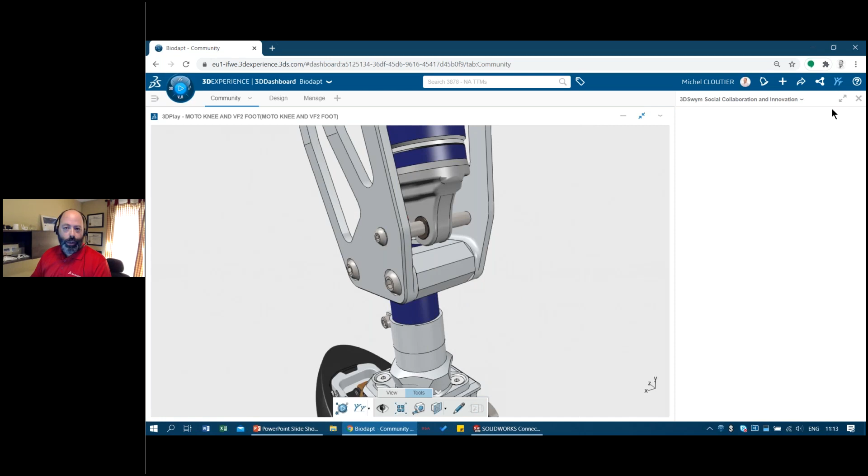Now with that, we also have access to create what we call communities. Communities are just a great way to exchange on different topics that we want to talk about. So here we have some colleagues of mine. I can see that Todd is online right now, so I could give him a call through the 3DEXPERIENCE platform, chat with him, or do a video call. But earlier we got Tandy that put a post saying, hey, we need to check a couple things. So he created this screenshot and put it into the message board so everyone in the team can collaborate. And there's two things.

We see down the bottom, there's too much deflection with the pin, so we need to fix that by modeling a new part. But then we have to validate the motion in the assembly as well. So that's going to be the first part of our task today. And the second part is going to be to design a cover for the foot and also insert a link that we see here. Again, another image that I put on the message board saying, hey, this is what we want to do next, right? So this is going to be our task for today.

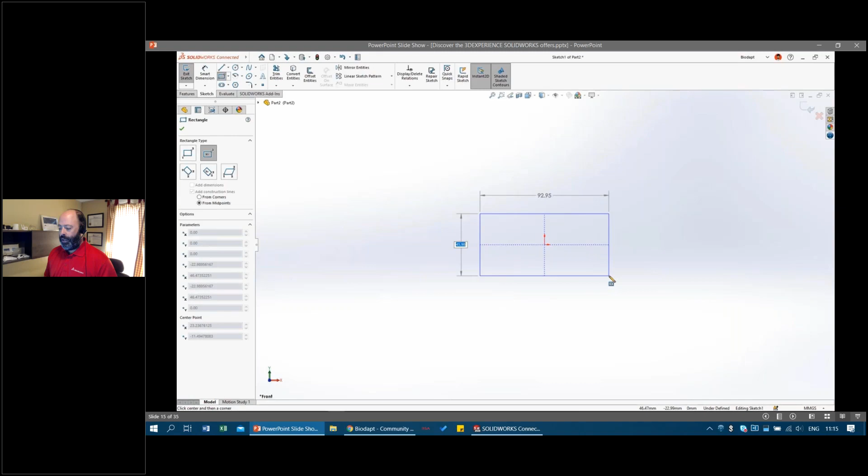Now, with regards to what we're going to be modeling, we're actually going to be modeling this little part. To save some time, because I'm sure most of you are very familiar with SolidWorks by now, I'm going to fast forward the modeling a little bit. So let me just walk you through how I've modeled this part inside of 3DEXPERIENCE SolidWorks. I start with the front plane and then create a rectangular sketch, put in the dimensions, 25 by 65, and extrude that mid-plane with a width of 40 millimeters.

Add some fillets, gather all the fillets with FilletXpert, use my Hole Wizard to put in the exact drill and hole I need. Then I go ahead and model the tab on top, extrude that using the M key for a midplane. That's a shortcut. And then I end up with this part. So very straightforward, fairly simple to do. It takes a couple minutes.

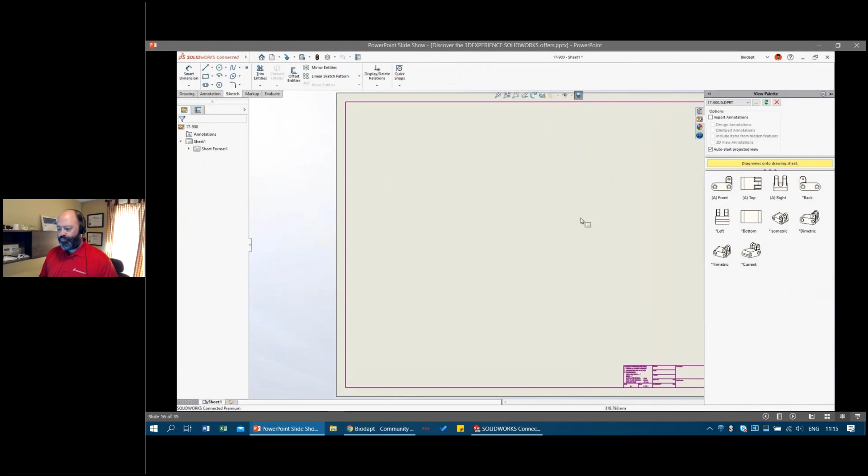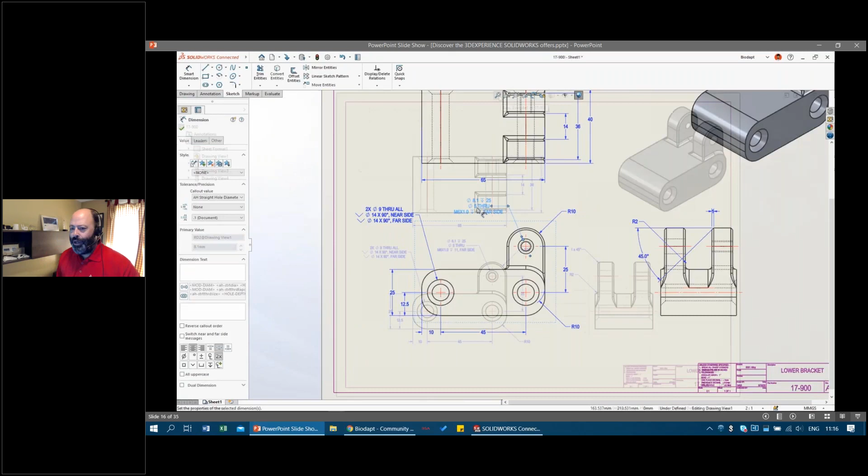But then I want to also do a drawing. Again, 3DEXPERIENCE SolidWorks is not very different than SolidWorks in how it works. Sketch, parts, drawings, views. I go ahead and insert my model items. They appear on the screen. I do a little bit of cleanup. Again, this is something for a SolidWorks user, not something new, something you probably do day in and day out, and that's where we're at.

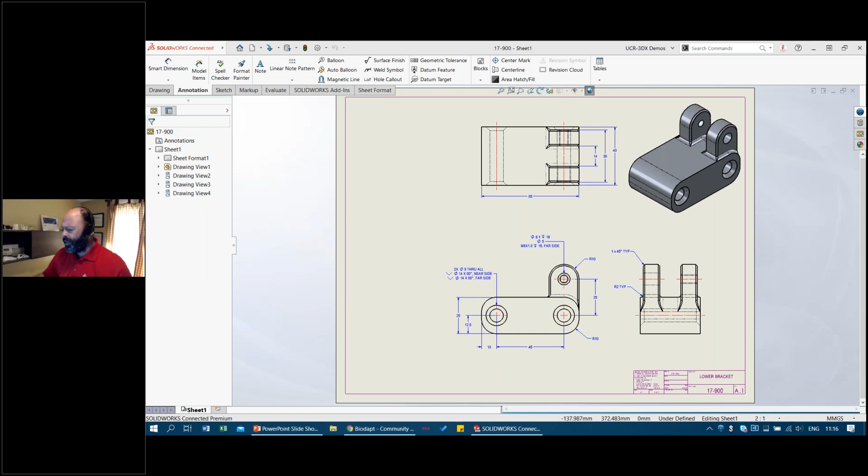So I just wanted to fast forward a little bit to save some time, but from here, I'm actually going to jump inside of SolidWorks and pick up where we left. So that's where we are right now. And one thing I want to do is that I now need to put in the hole here where the foot will connect, right? So for that, I'm gonna turn off my webcam just to save some bandwidth. Let's go ahead inside of SolidWorks. I'm going to use my regular SolidWorks command I know and love. That's my part, right? So I need to get that foot connecting feature.

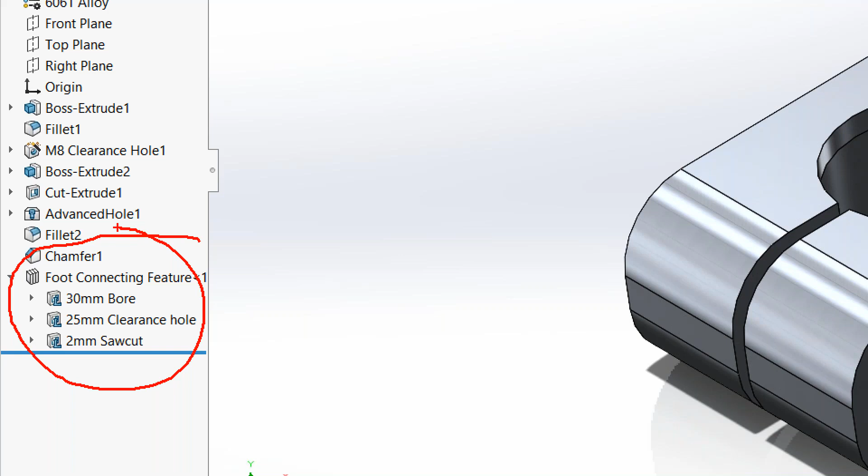Now to save, again, a bit of time and maybe a little trick here, I really encourage you to use library features to do that. You can actually save a couple standard features built into one. You can even configure them. It's a drag and drop. I select the edge, which is going to define the midpoint, and say okay to that. And very quickly, this allows me to model basically three different features just by a drag and drop from my design library. So again, that's a nice way to save some time.

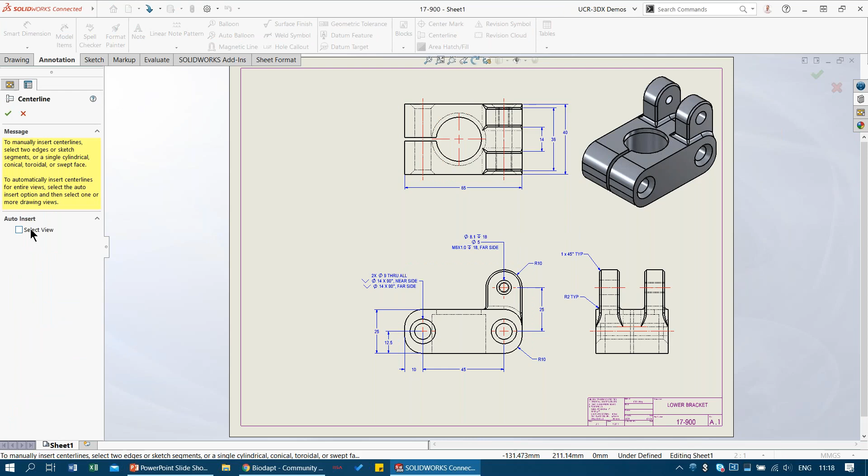Going back to my drawing using Control Tab, of course, the drawing is going to update, but I need to add a bit of information to that. For example, I want to add a center mark on the top view. I might also want to add a center line to the front view, like this. Click OK. A section view would really help me here. So using, again, my shortcut commands, I'm going to draw in a section view. Little tip here, when you've got a center line, you can snap to the center line. Really helps you make sure that you drop this section view dead on the center line. Click OK. We already got the center lines showing and the hatching because I've defined the material earlier.

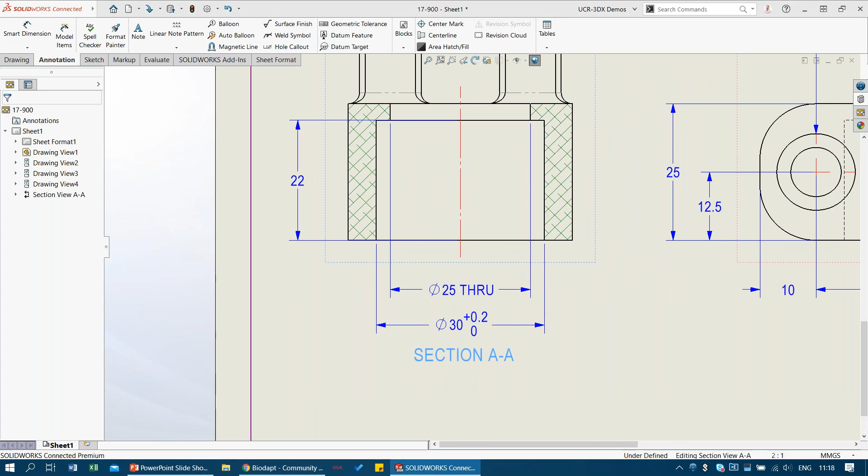Now, the last thing I'm going to do here is bring in my model items for the select few features that I've just added for the entire model, and click OK. And maybe do just a little bit of cleanup. So let's just move this over here. Let's go on top, and maybe we're going to add one dimension from the edge to the center, and that's going to be it, right? So I've finished doing the drawing. Now I need to save and update this.

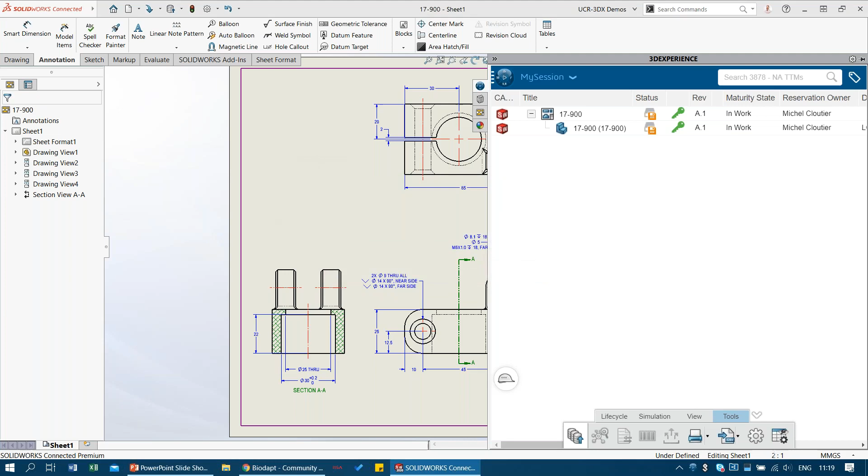Now, like I said, working with SolidWorks is not very different, but saving files is a little bit different. When I expand this window, I see my drawing and part associated with it, and there's a little status that says the file has been modified since my last save. Now, if I want to save everything, it's basically just one click. I hit the save button. It prompts me with this panel that presents me with some options. If I'm happy with them, I just hit save, and okay. I could also use Control S on the keyboard. It would have accomplished the same thing.

Now, the difference is that this is being saved directly on the cloud. What that means is that for other colleagues, if they want to look at this part and work with this design, they have access to it. It's instant. As soon as it's saved on the cloud, everyone has access to it.

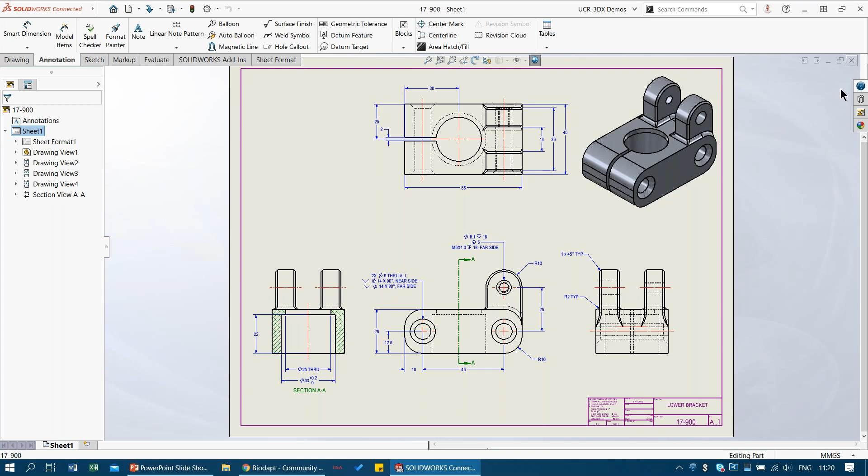Like I was saying earlier, modeling with SolidWorks is not very different than what you're already used to. The tools are the same intuitive tools we're familiar with. You can create the same type of models with part and drawing associativity. That really doesn't change. Saving the files, it's where the file is being saved that changes a little bit.

With all the data management built into it, we're going to talk about that next, because now I need to do some edits to the assembly, and some parts and assemblies of this design have already been released for manufacturing. So I'll have to create a revision, and we're going to touch on how to do that using 3DEXPERIENCE SolidWorks. Let's jump into the assembly, do our assembly modeling, a couple of checks to make sure we don't have any interferences and collisions, and then save everything back to the platform.

So switching back over to SolidWorks, minimize this, and I'm going to expand my assembly that I had already open. Let's zoom in this area. So you see now, this is actually the old design that I want to change. I'm going to start by window selecting and removing these pins. This is going to be changed and different, so I'm going to remove that. And this part here, that's the old part, delete that, remove it.

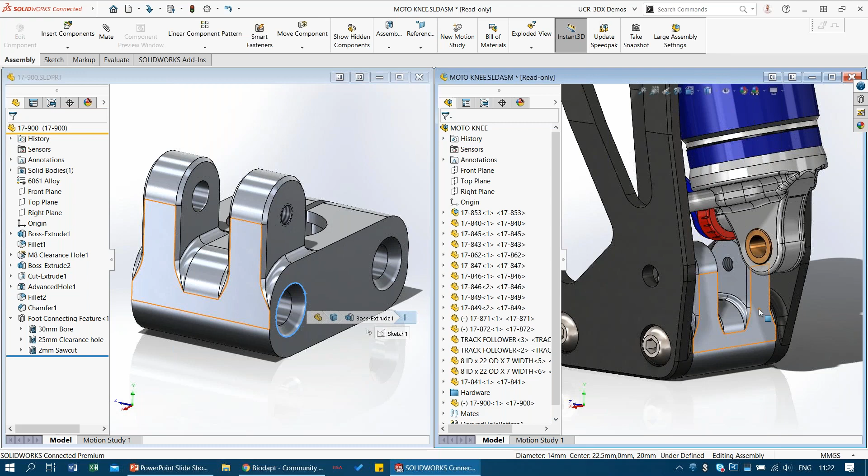Now I want to insert the new design into this one here. One tip, when you're dragging and dropping a part into an assembly, grab it by an edge or a face, and that would actually launch the Smart Mate function automatically. See, it actually snapped directly to where I wanted it to go. That means it's already concentric and coincident, so that saves me two different mates to do.

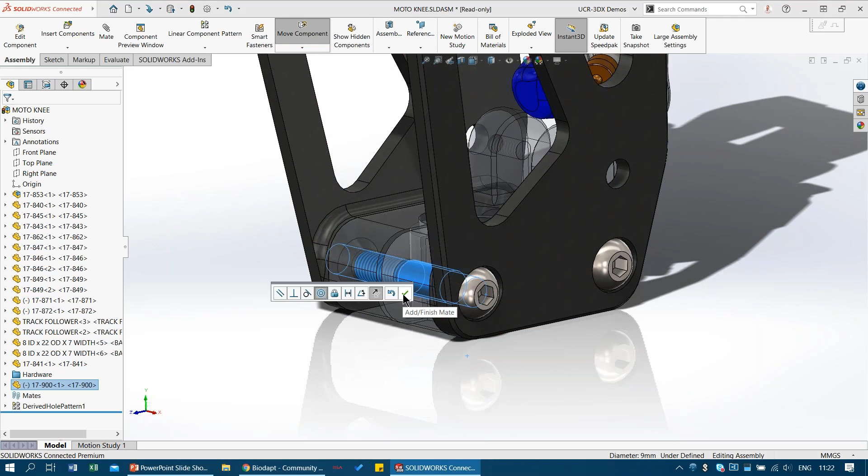Saves some time. The last thing I want to do here is Alt drag to again invoke the Smart Mate command and confirm that I want to have these concentric. Very easy, right? It's the same SolidWorks. I want to mate this shock here. Again, Alt drag the face to make it concentric and confirm.

Now I need to put in, earlier we had a pin that was too flexible, I want to replace that with a shoulder screw. That's going to stiffen it quite a bit. I want to see the length of the shoulder screw. So the length of the shoulder screw is going to go from this face to this face.

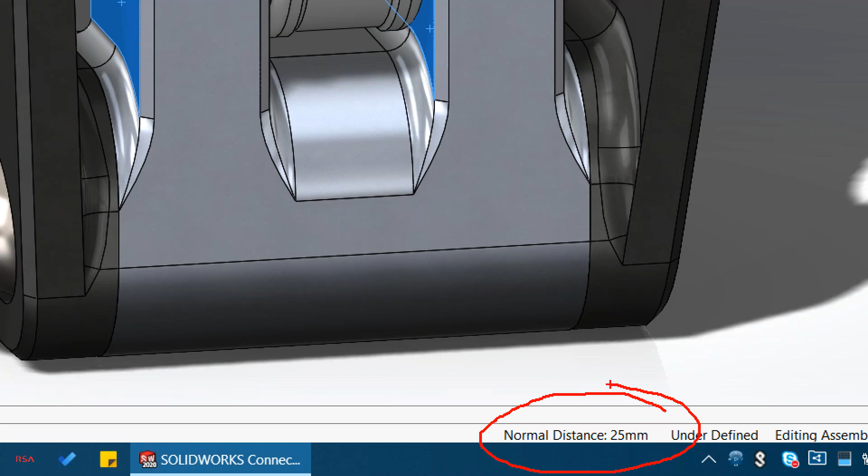When I control select these two items, you might have noticed down the bottom, that's another quick tip. When you control or single select, we actually give you the distance or the length, so it saves you from going into the measuring tool. Now I know my shoulder screw is 25 mil long. That's actually an M6 shoulder screw.

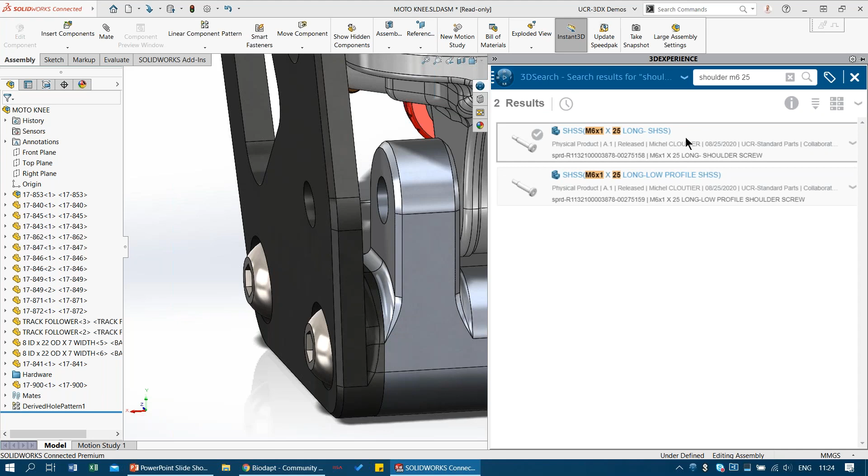So I'm going to leverage the platform and search for a shoulder. I'm just going to search shoulder right now. So now it's going over where all my files are on the cloud and giving me 629 results, which is a little too much for what I need. Let's filter down this search by saying M6x25, enter. You see now it filters that shoulder M6x25. I got 2 results, one with a regular head, one with a low profile head. I want to take this one here.

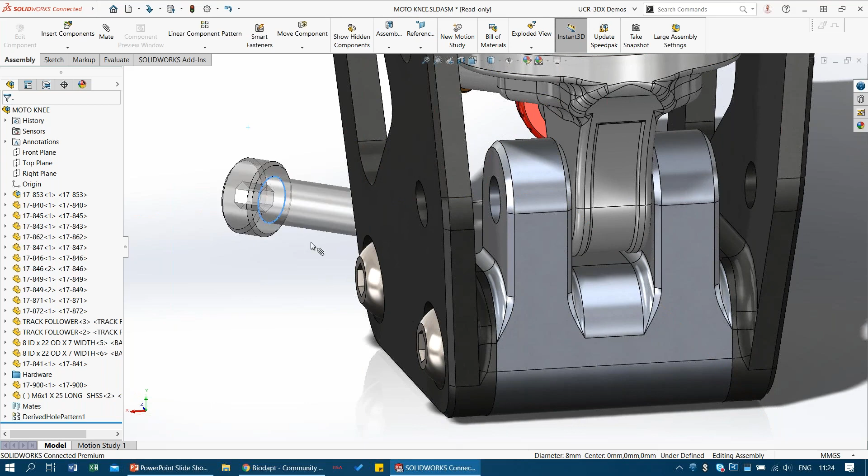Let's just squish down this a little bit, drag and drop inside of SolidWorks from my search results, and there it is, there's my screw. The only thing I need to do right now is assemble it. Again, Alt drag, grabbing the edge, makes it coincident right on the face.

Now I'm going to have a really hard time putting this screw in, so I need to widen up this hole. So I'm simply going to select it, double click to bring up the dimension, from 8 to, let's go 16. That should be plenty. Click OK to confirm, and that works really well.

Awesome. So we've completed the design down the bottom. We need to do some design on top as well, because let me just show you the mechanism here. There's actually a little cam system here, with the shock absorber.

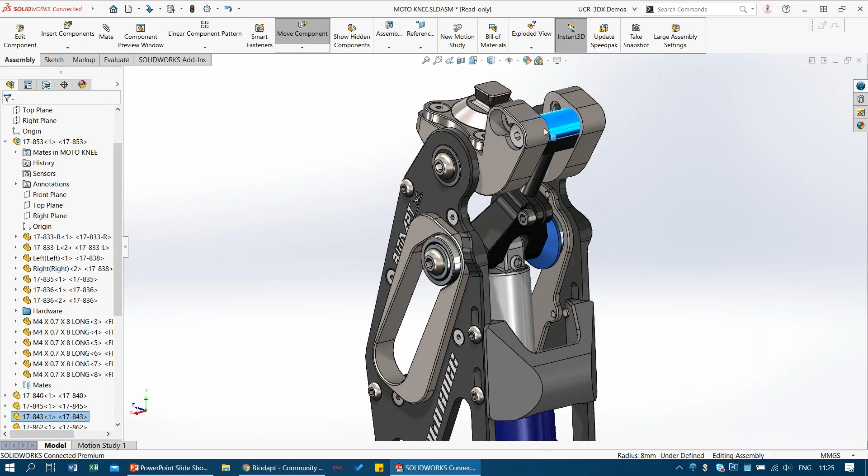As you can see, this cam goes through the side plates, and there are actually two positions to provide some adjustment. I want to check if everything works right for the other adjustments as well. Just by selecting the screw, I have direct access to the mate. I can edit the mate, so let's unselect this face and select this face instead, then confirm.

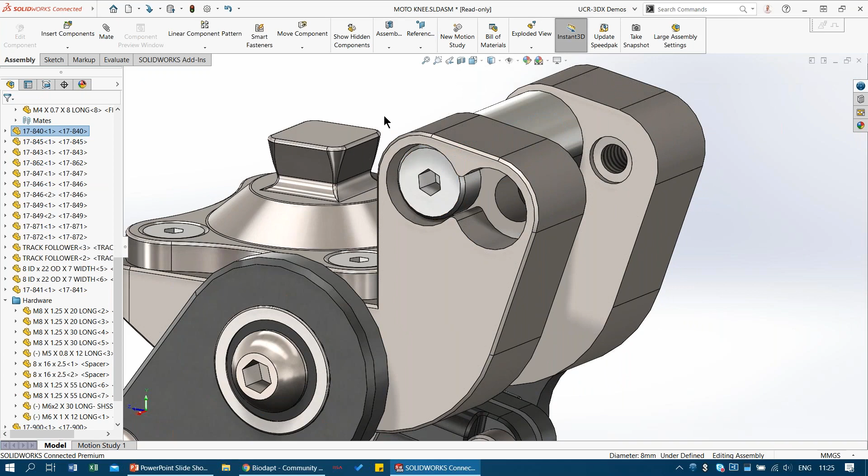Everything repositioned and went back into its place, but it's still moving, so let's check if we have any interference detection. Using the Evaluate tab's interference detection tool, I'll click Calculate, and we can see there are a few interferences here.

We can cycle through the interferences. If I hide some of the components, you can see some interferences right over here. That's not good, so we need to find a way to fix that.

To better view those interferences, I can also use a section view. I love section view, I have to say. Let's quickly look at this section view.

If I want to see how much motion I can get out of this before it actually clashes together, I can use the collision detection tool, select the parts I want to drag and move, and you'll see it stops once it's colliding.

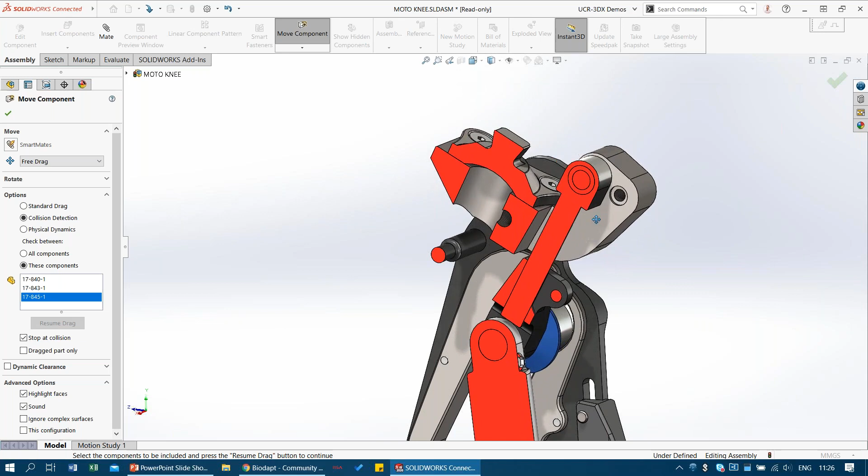So I'm missing some range of motion here. What I want to do is actually change the angle of this face. Let's go ahead and double click.

Change that to 12 degrees. Hopefully that gives me enough room to clear the motion and get a good range of motion.

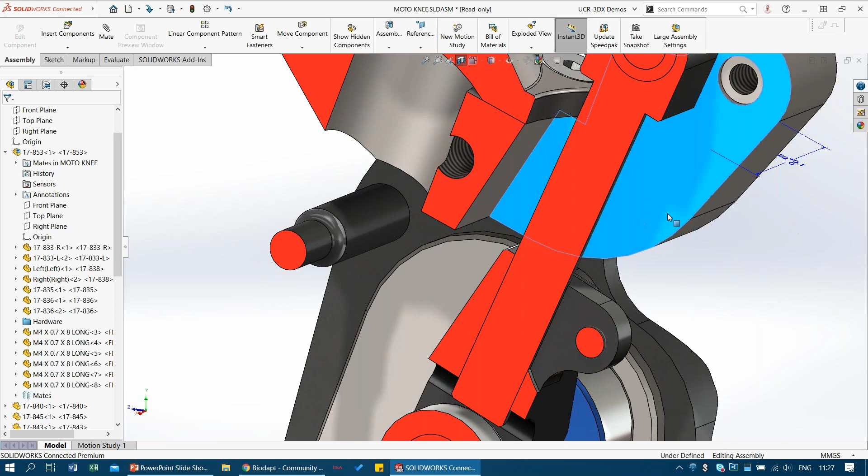That works perfectly. Now I've changed this part here, and I'll just turn off my section view.

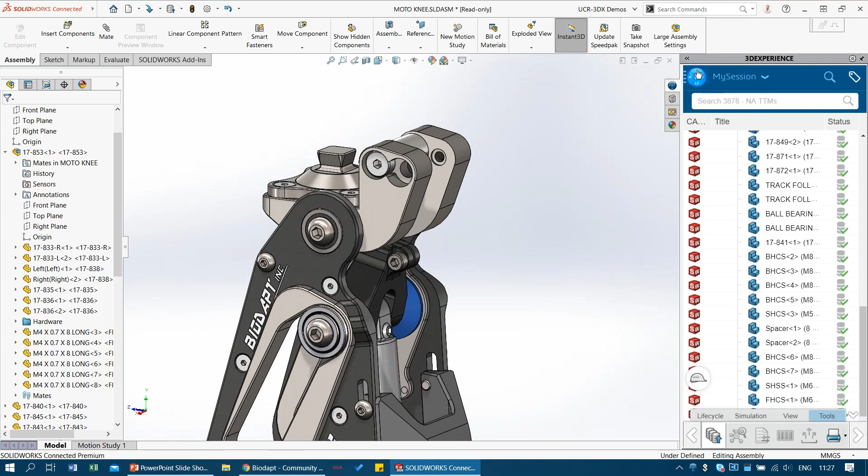Now that I've changed this part, I want to know if there's a drawing associated with it. Let's go back to our panel that shows us the tree and the components in my design. What's cool here is that this is interactive - if I select the part, it highlights in the tree.

Now I want to know if I have a drawing for this. I'll simply hit relations, which exposes basically everything related to this part, whether assemblies or drawings. Now we have a nice tree exposed - I know this part is being used in this assembly, which is open right now.

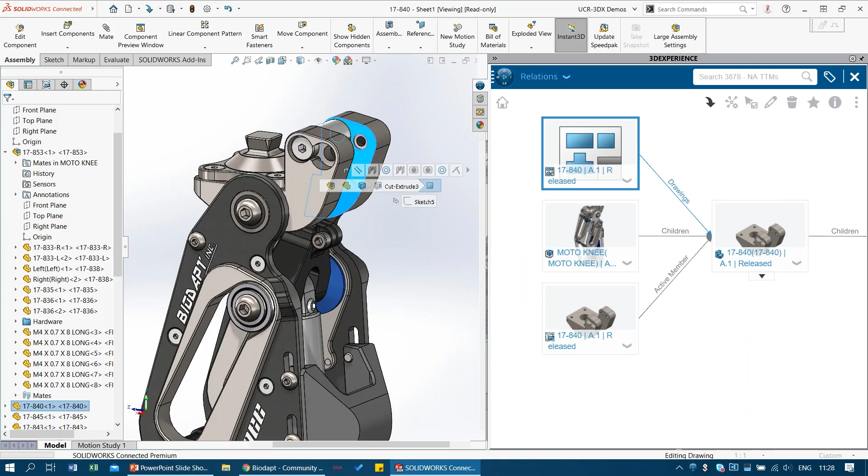But now I know there's a drawing that I need to update as well. Let's select the drawing, and from my relations panel I'll simply say to open it and see - the dimension at the bottom updated automatically. So when it opened, it updated the dimension automatically. The only thing I need to do now is save it.

So let's go back to our panel, and from here I want to save it. But I want to bring your attention to one thing - this is set to release. As I said earlier, data management is built into 3DEXPERIENCE SolidWorks, and it also has maturity states which prevent me from doing things I shouldn't be doing.

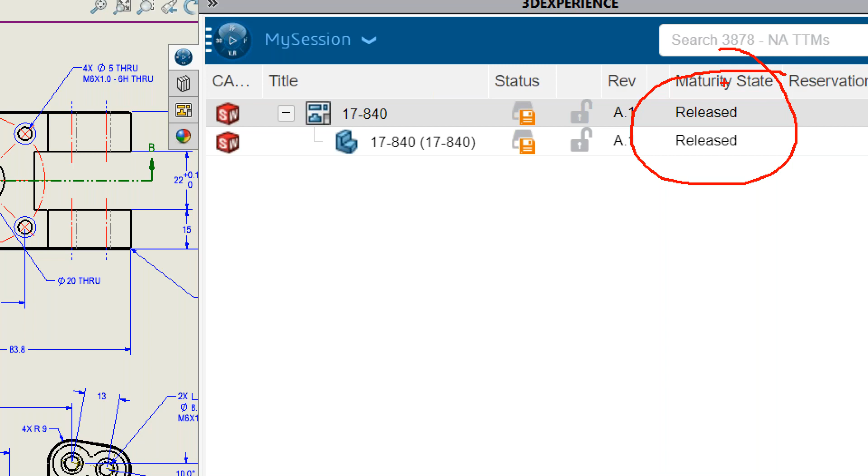For example, I'm not supposed to overwrite or change a file that is released, or a drawing that is released. So what am I going to do now? Well, I'm going to create a new revision.

If I try to save it, I'll get a warning saying, hey, you're trying to modify something you're not allowed to. But instead I'm going to create a new revision - right now it's revision A1, and it's going to bump to B1.

I can add a comment and say I removed clash, just to let everyone know what's been happening. Then I'll say I want to release the reservation, because this also shows a reservation owner column - it's blank right now, meaning no one is working on this file.

So it allows me to save it. But if someone else were working on the file, it would stop me from overwriting their work. I'm all good, so I want to create a new revision for both the part and the drawing. I hit save, and now I'm going to create that revision once it's saved - but it also gives me history.

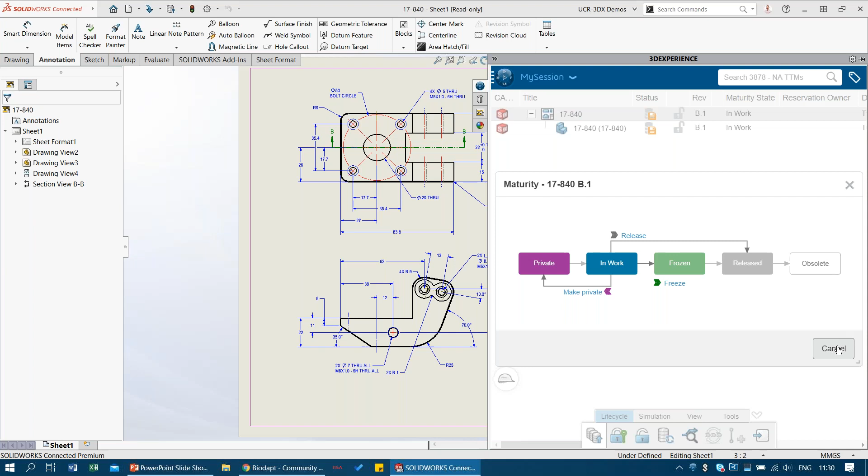So if I want to go back to an earlier revision, I can. I can also push this into my life cycle. For example, I need this new drawing to be reviewed, so I could send it to the freeze maturity, or I can send it completely to released. If I'm okay with the design and it's a small change, I could push it directly to the release stage or frozen and have a review on it. So all of this is built into 3DEXPERIENCE SolidWorks.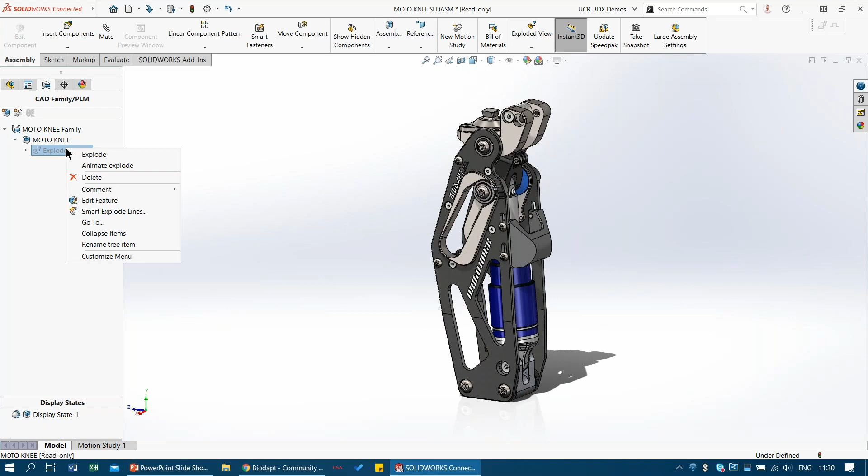Now going back, we can close this, we saved it. So we can simply go back to my assembly, but I need to do some changes to the assembly because that assembly has a drawing as well. And what better than explode views, right? When we detail assemblies, explode views are great to show how everything is built and put together.

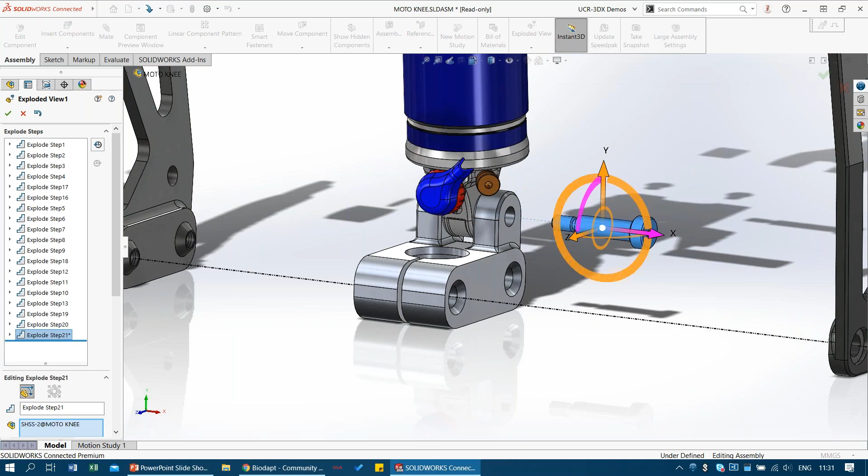But I need to update my exploded view. So I'm gonna edit this feature. Let's grab this shoulder screw, put it over here, grab this lower bracket, drag it a little over here. That looks good, I'm gonna okay that.

Maybe a couple last things I want to do here is some explode lines. Let's take this, move it through here, through there, just to clearly show how this is going to work. And maybe the last thing is a jog in this explode line through this part, just like this. And I can reposition the explode line so everything looks good in my isometric view.

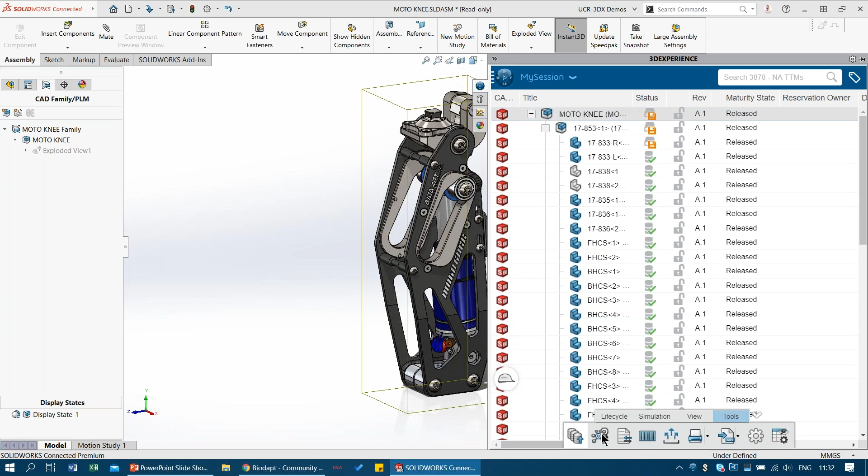So very quickly, I've updated my explode view. Let's collapse this. So I got my design complete, but I said we need to update the drawing, right? So I could do a couple of things. I could search for my drawing using the search window. I really like to use the relation just to find stuff. It just exposes everything inside this assembly.

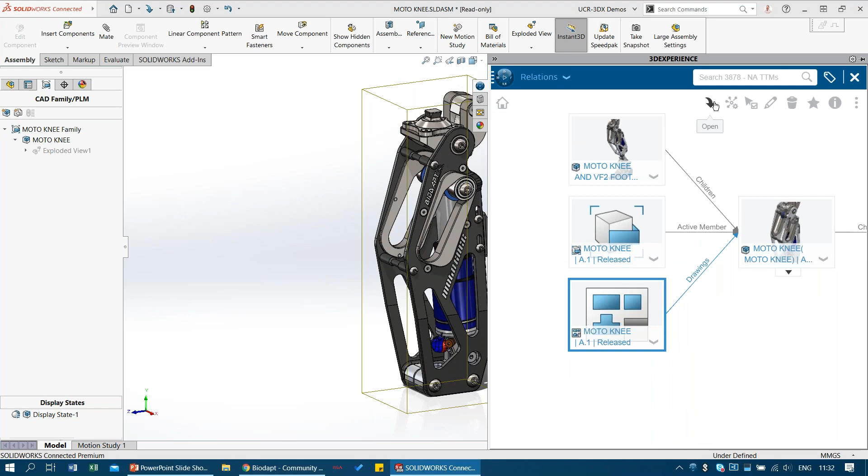Maybe I don't even know if there's a drawing yet of this assembly. Well, this exposes everything, even the children of this assembly. I know the drawing is here. So again, let's just select it, say open. That's going to open my drawing.

Takes a couple seconds. Now this data, remember, is on the cloud. So as I do that, it's actually pulling the data locally to my computer. So now I can work locally. When I save it, all the data is being saved back to the cloud platform.

So let's just move these arrows over here. That's my item 28. Let's move this a little further down. We're gonna take the whole magnetic line, like this balloon, pointed to this part. So those are items 28 and 29. That should match my bill of material, 28 and 29.

We're all good. So now we need to save everything I've done so far back to the platform. Again, using the panel on the right here, it exposes everything that changed while I was working, represented by the little yellow icon. Basically, it's telling me these files have changed since I've opened them.

And you see, everything is in release. So all of this assembly was already released. So what I'm going to do is, as I save, like I said, I cannot overwrite something that is already released into manufacturing, but I can create a new revision. And that's what I'm going to do.

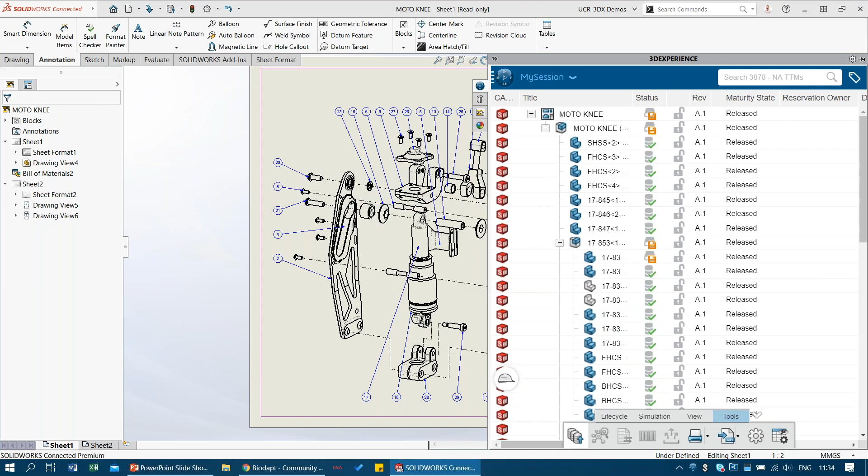I'm going to select only the files that have changed. This is actually the side plate that I've changed the diameter of the hole for, so I could put the shoulder screw. This is part of a sub-assembly, so I need to update that too. And now you see all the warnings have gone. I can put in a revision comment: added lower bracket, and removed clash.

And then because I'm done working on this assembly and these parts, I'm going to release the reservation of these files. And you see, this one is actually still reserved to me, which is the part that was designed earlier. But I can now save.

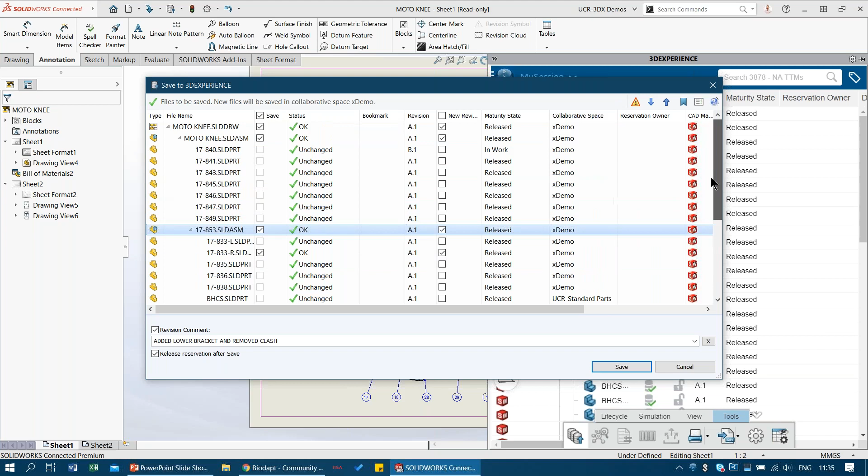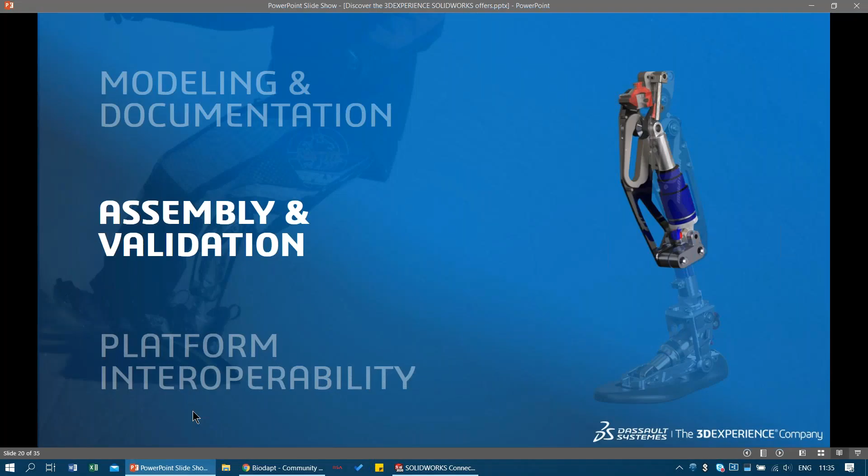And again, while I'm saving this to the platform, all my other colleagues now have access to the latest revision directly if they want to share that data in their design. So as I said, 3DEXPERIENCE SolidWorks is SolidWorks. The base is SolidWorks, so you can still do your assembly modeling, collision detection, interference detection, all of that.

Really, the difference is that it's already built in, has built-in data management, rev control. You saw the maturity states where you can control if it's released, if it's in work, if it's frozen, because we want to do a review on documents. So all of that is really built in. That's the biggest difference. And also the file storage is on the cloud, right?

So now the next thing I want to talk about is how do we interact with other tools on the cloud? So if you were on our webinar last month, you saw xDesign and XShape. You didn't really see how that would work with SolidWorks though, right? I didn't really show that. I want to do that today.

I want to take this design where we're at right now and use some of the other tools on the platform to integrate designs from xDesign or XShape, or even use common tools like tasks, so we can define tasks and assign tasks to people. So let's see how that works. Going back into SolidWorks, I'll do a little bit in SolidWorks, but then I'll switch to the platform and do some xDesign and some XShape. So let's jump back into it.

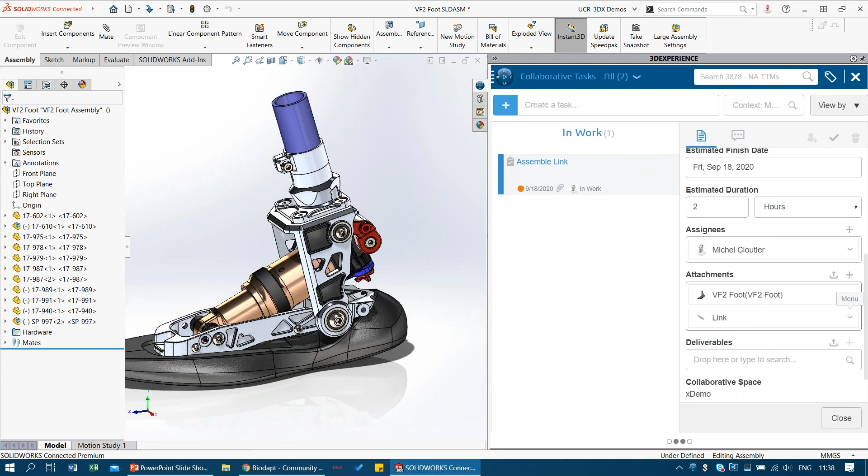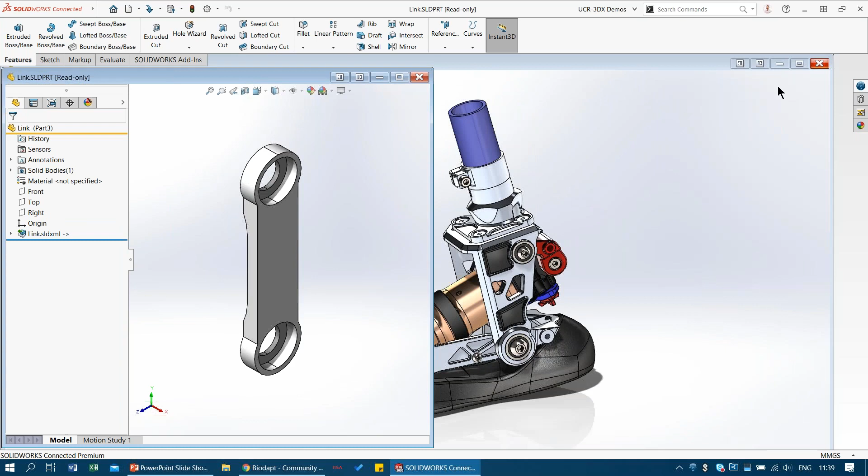I want to do the same thing for the link. I select it and I say open, and it's pulling the link from the cloud, from my cloud storage area, and opening it inside of SolidWorks. Now this link specifically was not designed in SolidWorks. It was designed in xDesign, but I want to assemble it to my foot over here. So let's tile the panel. It's actually going to be assembled right over in this area.

Again, drag and drop. You saw me do this already a couple times. Snap into place. We can close this. We don't really need it anymore. Let's maximize this window. And now I need to assemble it down the bottom here. See, it's kind of free floating. Again, Alt drag, concentric. I'm happy with that. Click OK. And that looks good.

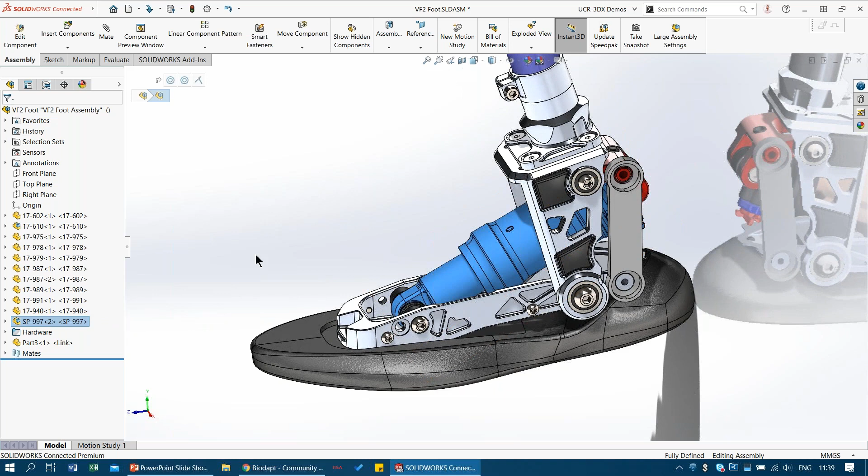Now the last thing I want to do is validate that there's still motion. Now this is actually a subassembly. If I make it flexible, I should be able to move this. There you go. So that kind of shows you a little bit the motion that this is going through. Let's put it back rigid for now.

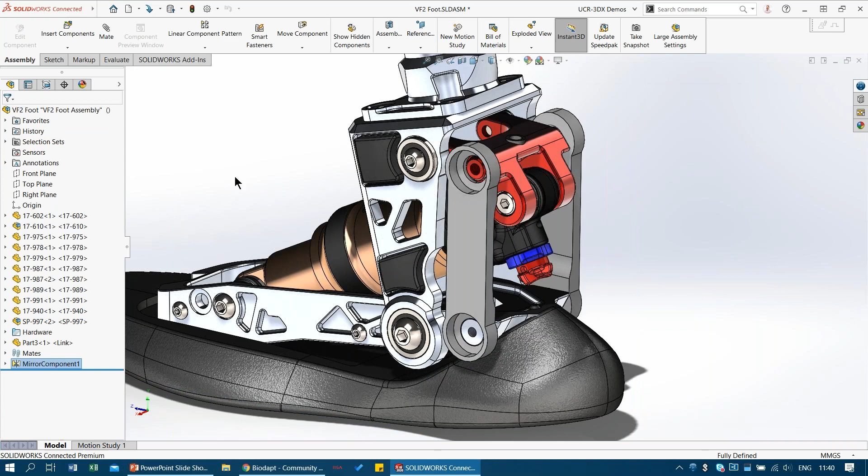And maybe the last thing I want to do here is do a symmetry. So I'm going to select the part, control select the right plane, go into my mirror component, click OK. There you go, it's on the other side, and maybe add some hardware. Now the hardware is already there, I just hid it for the moment, but you could complete that with the full hardware. That looks good. I want to save that. Going back to the platform or into my session, we see now the little icon saying this has been modified, and I want to save that.

And on the bottom, you'll see the two different links here and here with a different icon. The icon actually represents where it was designed originally. So all these files are SolidWorks files, but this file is a native 3DEXPERIENCE platform file. Yet I can still go ahead and just save everything back into the platform and update the whole assembly.

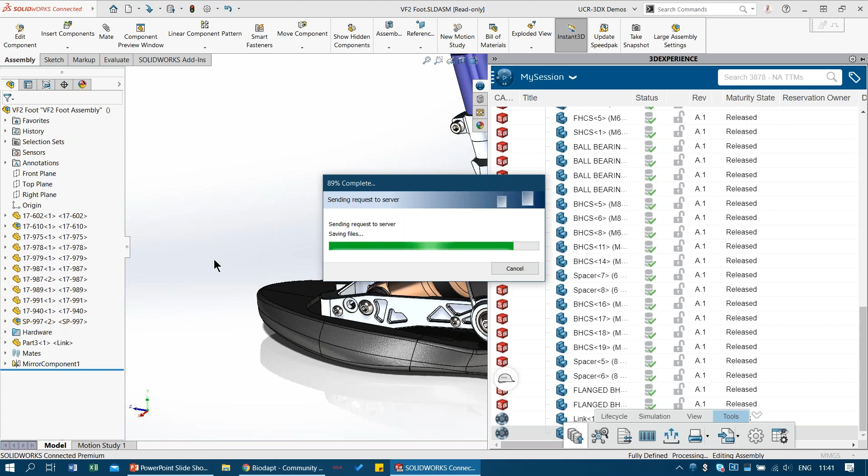I'm happy with the changes. These are already in work, so I don't need to put in a revision or create a new revision for that. I'll just save it. So as this is being saved, again, all the data is being saved to the cloud, published to the cloud.

I could go back into my collaborative tasks, and if you remember, in my task of assembling the link, I also need to remove material. Now, I want to remove material in the link part. That part was designed in xDesign, so we should really be doing that inside of xDesign. So what I can do here is from my Google Chrome browser, I'm going to switch to the tab where I have my xDesign tool.

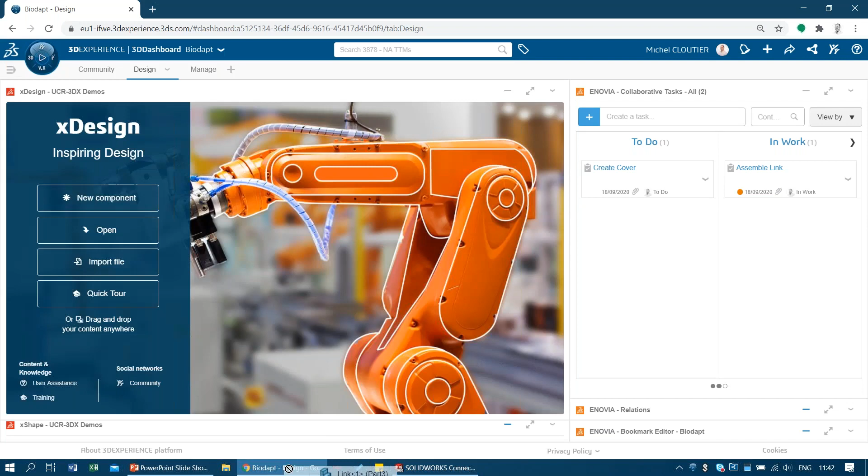And just to show you how compatible things are, I can actually grab the link from here, drag and drop into my Chrome browser, and open it directly into xDesign. Just a quick way to get to files. So you see here how it was designed. xDesign is a parametric tool, very similar to SolidWorks, with the difference that it's running on the cloud. So I don't need any installation at all other than my browser.

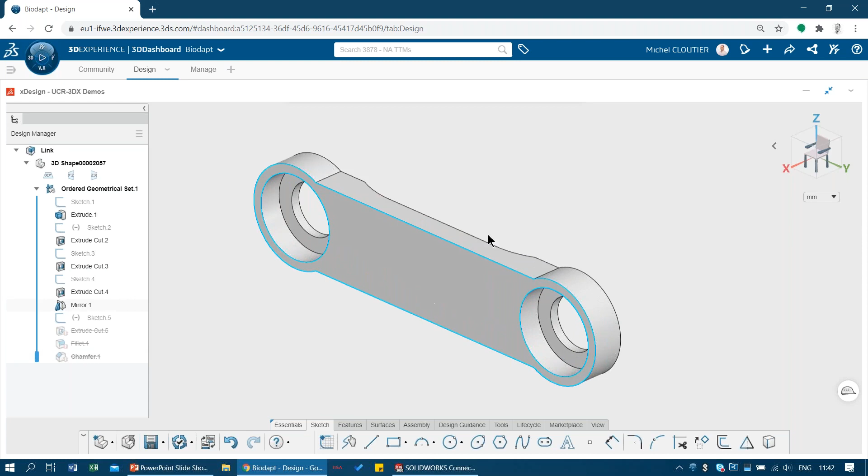But I want to do some changes. So let's go ahead and sketch on this face. And you'll see some of the UI here I'm using. I want to convert this, again, something that you're likely used to by now. Draw a line, horizontal, vertical. This line here, I'm going to select it and say it's going to be a center line. I window select everything. I'm prompted to do a mirror because there's a center line right in the middle. The S key brings up the shortcut toolbar.

I'm going to drop in this at 14 millimeters. That looks good, and I want to remove material, so I'm going to do a cut using a surface cut both ways, and I'm happy with that. So very quickly, I'm removing a little bit of material. We're talking about grams here, but still, it's going to affect the overall performance and weight of the product.

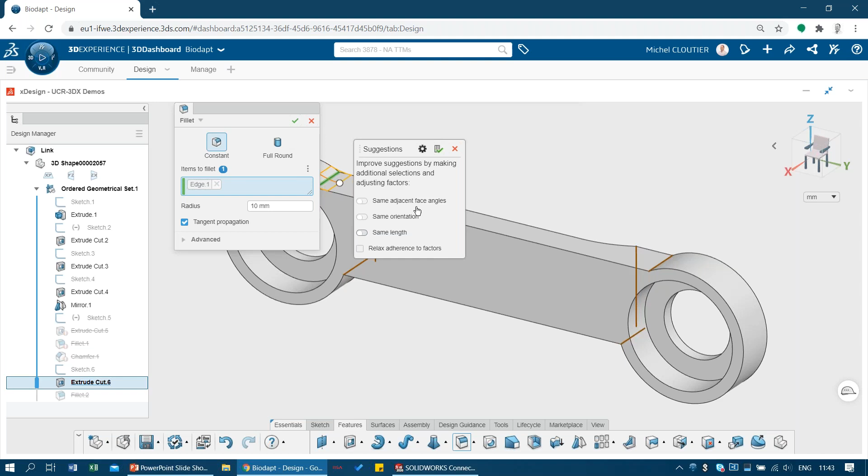I want to add some fillets. Remove these sharp edges. Very similar to SolidWorks, we have tools that automate the selection of edges. So really quick, without picking just one of these edges, I've got all my 6 edges selected. And maybe the last thing I want to do is drop in a little chamfer here with my option to propagate tangency, the other edge, drop that over here and save it. And that's how quick and easy it is to change something using xDesign.

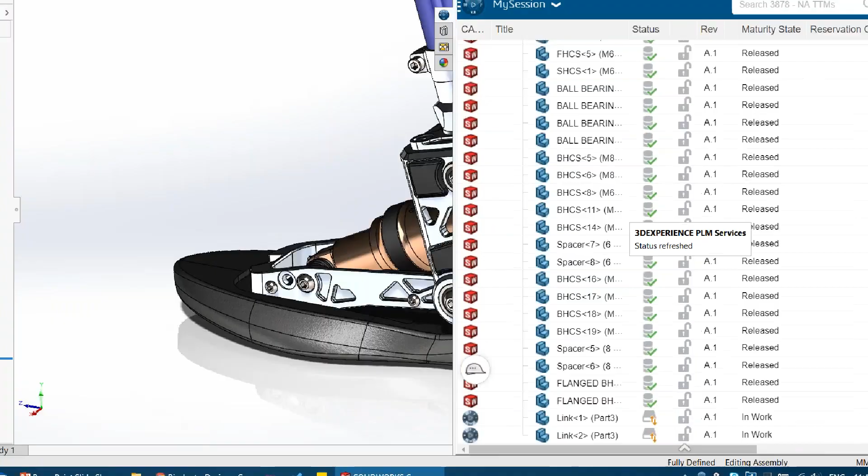Now the beauty of this is that once it's saved, I could go back inside of SolidWorks. If I open my panel and just do a quick refresh, you'll notice something down the bottom. There's a new icon down over here, and basically this is telling me there's a newer version available. What does that mean, and how do I update it? Well, it's very simple. Right click, and I say I want to reload this newer version.

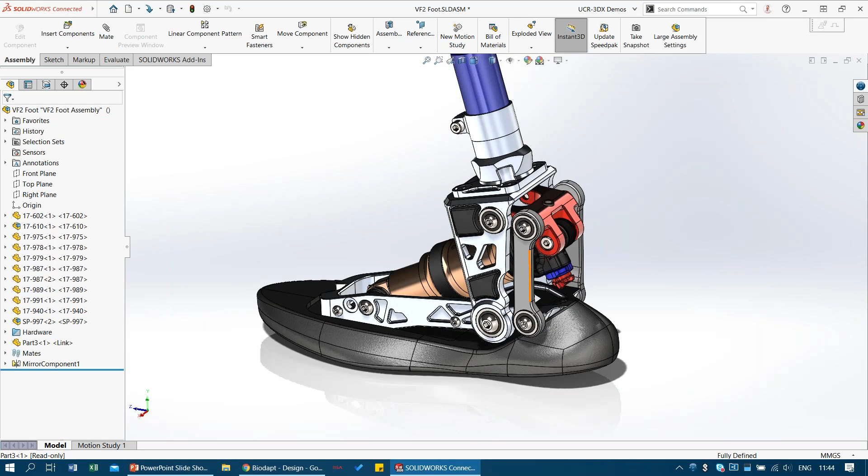So it's going to go back to the cloud, read the data in, and basically swap it out right inside of my SolidWorks assembly. There it is. That's my new design I've just modified. And maybe the one thing I would do here is use my mirror component option just to flip the part around so it's actually oriented the same way on both sides, but that's a very easy fix. And there you go. There we have actually a hybrid design now. It's SolidWorks and xDesign.

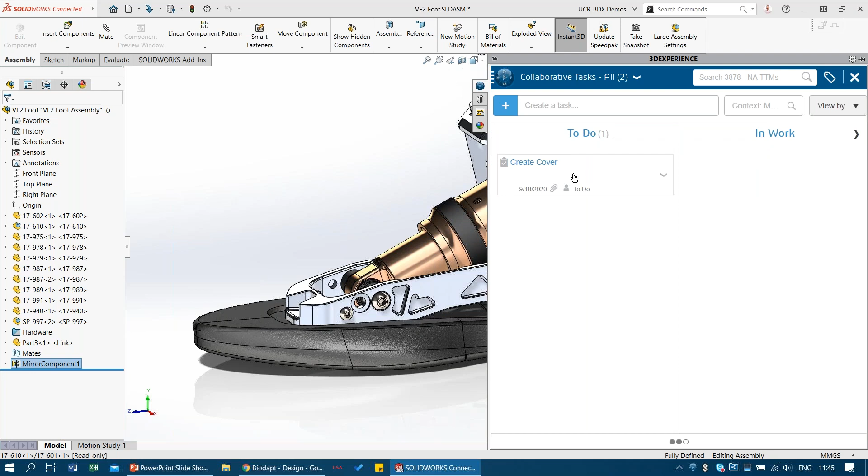Now, the other thing too, if I go back to my tasks, I was working on this task, so assembling the link, that's done. So I'm gonna move it, oops, I'm gonna move it to completed. Now, the other thing I wanna do here on another task that I'm going to start working on is create a cover for the foot. So this is our next step that we're going to be working on. Again, I need to work using this foot, which is the model open here.

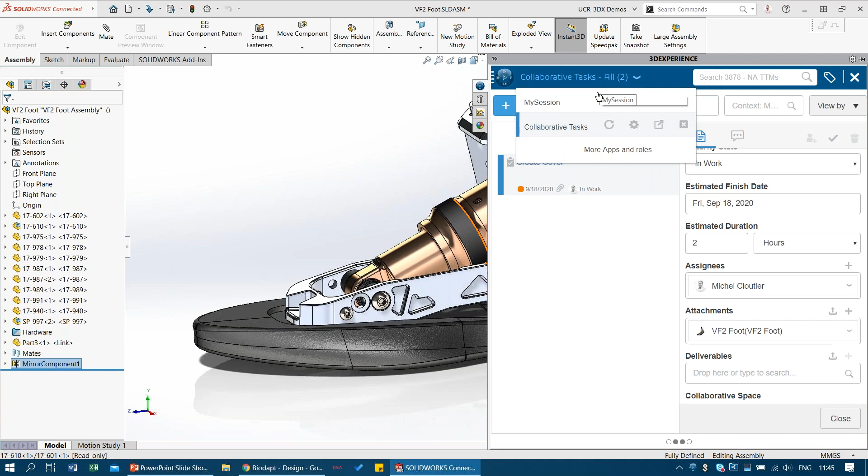So I want to open this model and do some new design this time. So again, I'm gonna go back into my session. Again, same little trick I showed you earlier, drag and drop from my window over here. I'm gonna say I wanna open it.

So now, if you notice, I'm actually opening a SolidWorks design in my cloud CAD design tool, right? And we can see that from the little icons in the tree here. We see there's a little red SW. That shows me that all of these parts were originally designed inside of SolidWorks, except the last two links down the bottom. Now I need to do some changes. I want to add a new part.

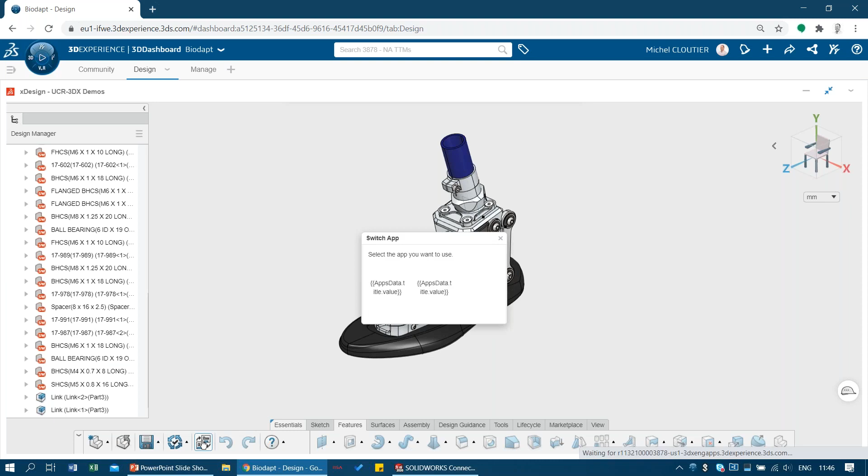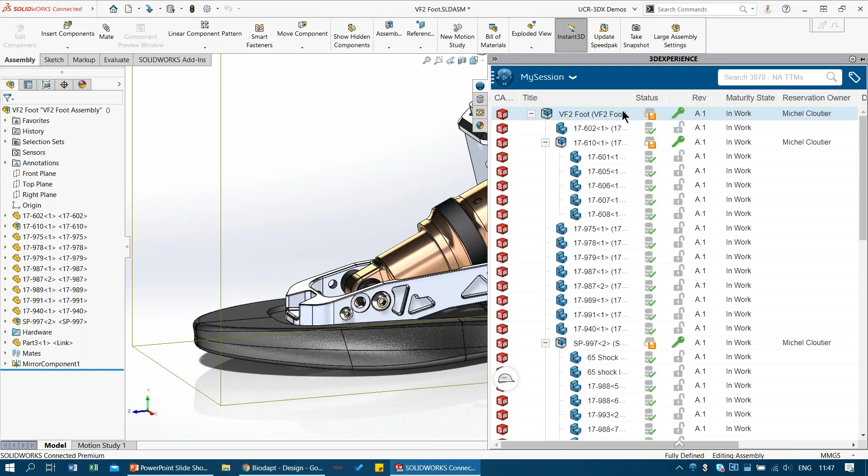Now before I do that, I'm gonna switch to my xShape so I can create or toggle through that state, right? So actually let's try this. Let's open it, but in xShape. So here's xShape. I'm going to take the same assembly, open it inside of xShape. Now the difference between xDesign and xShape is really the approach you take when you design something.

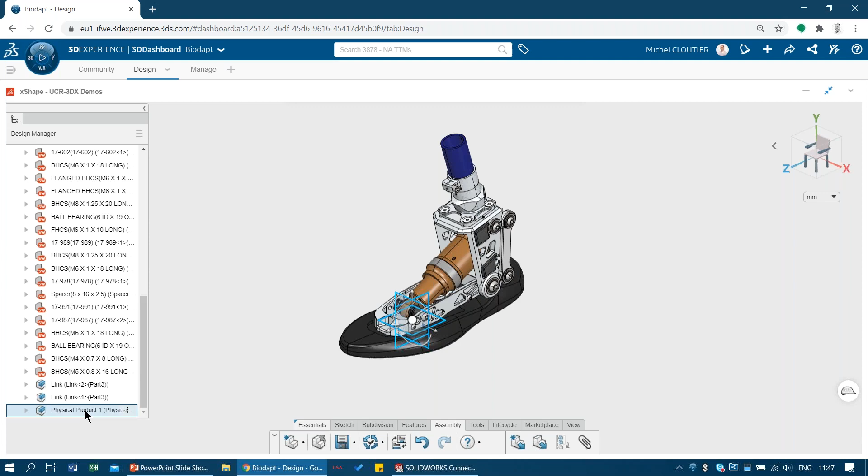If I wanted to design a new part in here, I could create a new part, obviously, in my assembly. It's going to appear down the bottom. I'm going to double click so it activates, meaning that I'm going to be working specifically on this part. Once it's activated, I'm simply going to rename it cover, just like this, and start working.

Now, if I were in xDesign, I would probably start with sketches and surfaces, which we have inside of xDesign, but inside of xShape, we start with primitives, a very different method of modeling. It's called subdivision modeling. So I'm going to drop this primitive somewhere over here. I'm kind of eyeballing it at this stage, but while I model this clay block, ask yourself, how would you do it in SolidWorks, for example, right?

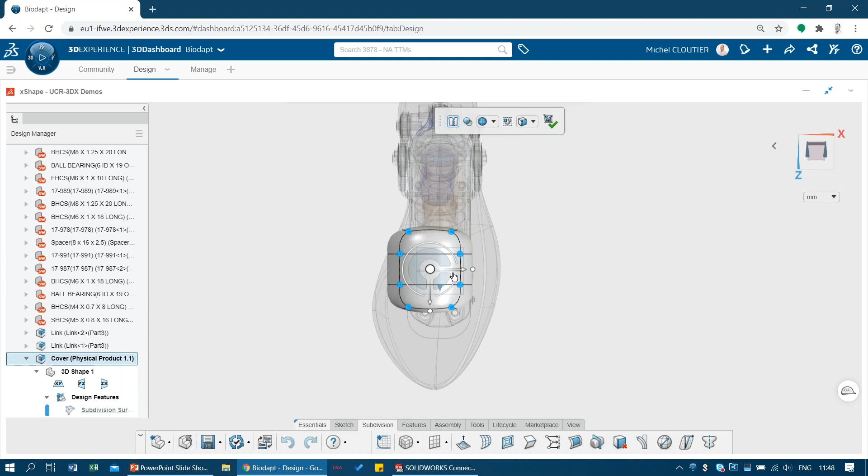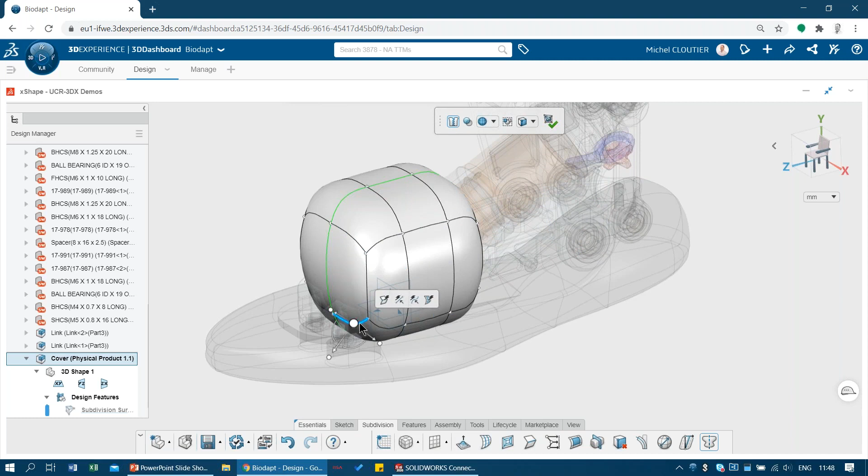So I'm gonna select everything, maybe move it a little bit towards the center so it's aligned, okay. As I want to do some changes to this shape, I also want to activate symmetry, making sure that everything stays symmetric, just like this. And now I need to have some hard edges though. So I'm going to control select a couple edges around this shape, kind of come over here like this and create what we call a crease. So that's going to actually create a sharp edge.

And now I can start moving the shape where I want them. Now I don't want to use this kind of odd angle. I want to use XYZ coordinates to move them. So I can move this, let's say over here. And now I'm really going to start modeling this to the shape I want. So I'm going to select these points, stretch them out here. Select these points, stretch them out, maybe over here. Select these points, stretch them out, maybe over here.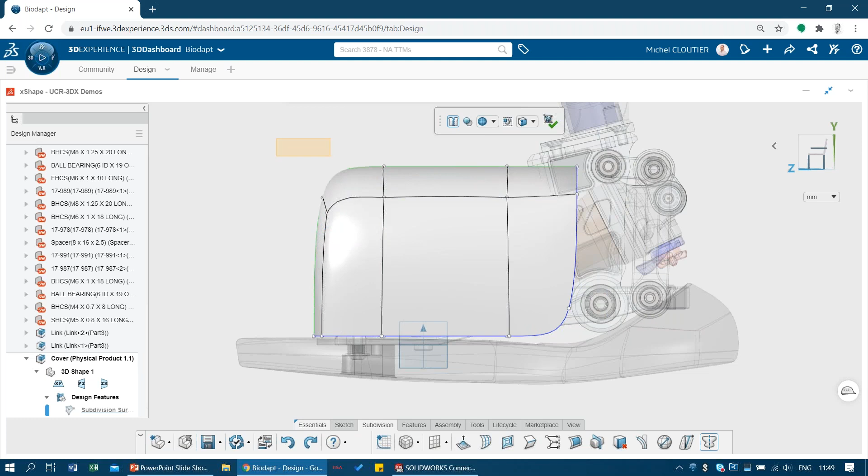So still fairly blocky shape, but now I want to get some curves into it. So I could maybe angle, let's do an undo, reselect and maybe angle this a little bit, maybe pull it down. That would probably get me a nice shape. But I want to do something different. I want to do something more, I guess, extreme.

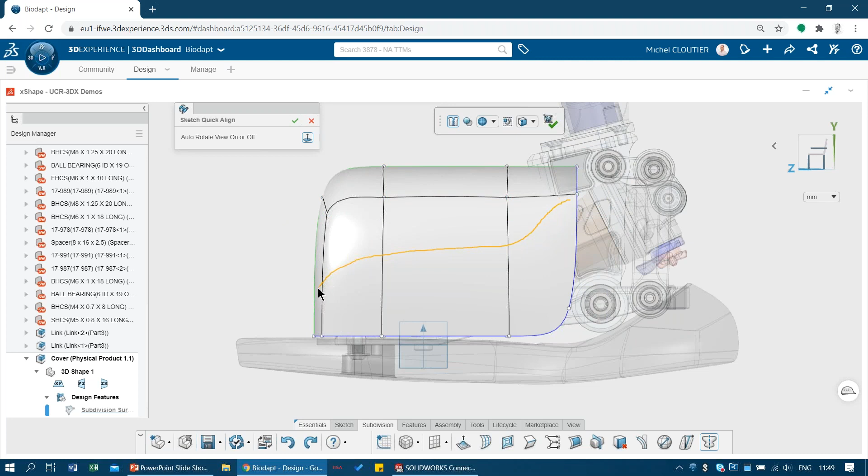I'm going to window select all these control points and then say, well, I want to have something that's going to go maybe around like this. So using my mouse, I basically sketch a curve or spline and the whole shape adapts to that. That's really, I have to say, kind of cool. And now I can start modeling this shape.

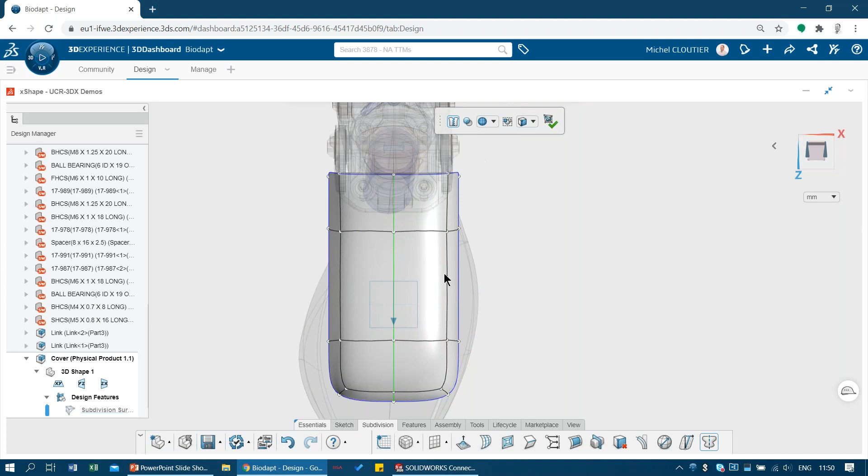I can see now it's fairly wide, so I want to make it smaller. So I'm going to window select. Again, because I still have symmetry, I can push it in, maybe up over here. I think that's going to work well. And now I'm going to turn off symmetry because now I really want to get artistic with this. So I'm going to start pushing and pulling these control points into the shape I want.

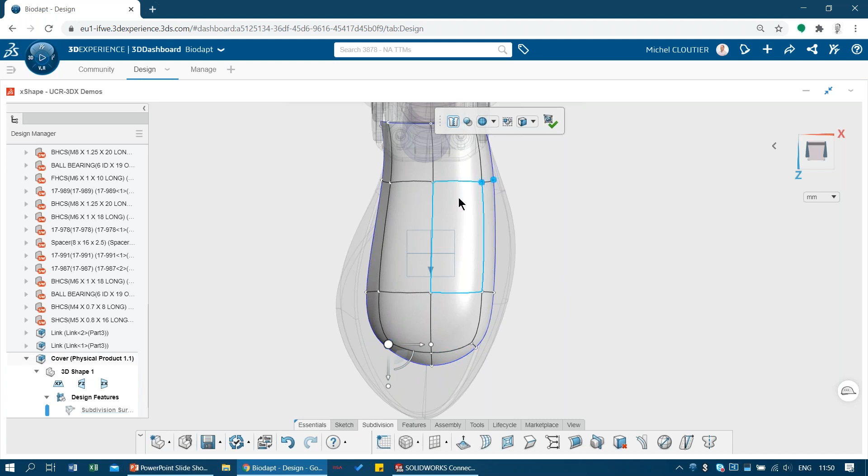You see, I'm just window selecting and pushing things in and out. Maybe this, I want to pull it out, kind of give it a shape more like a toe or a boot, something like that. So I can push them in, push them out. Really, at this stage, I'm just having fun, kind of working this into the shape I want, which is cool.

So very quickly, I'm able to get this very curvy shape that would have otherwise required me a lot of work just to get done using splines and sketches. Now, the other thing too, thinking forward, this is going to be a mold, right? It's going to be molded. So I want to make sure I have provisions for draft analysis for my drafts.

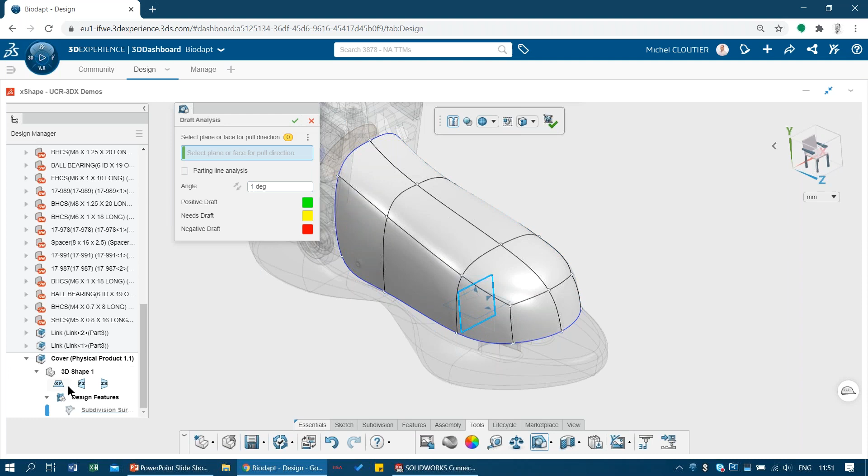So I have a draft analysis tool built in that shows me that some of those yellow here, I'm going to have a problem. If I mold this, I'm likely going to have a problem to get this out of the mold. So I want to change the shape, but I can actually just pull in, and you see this is interactive. If I push out, it's worse. If I push it in, I remove the negative draft.

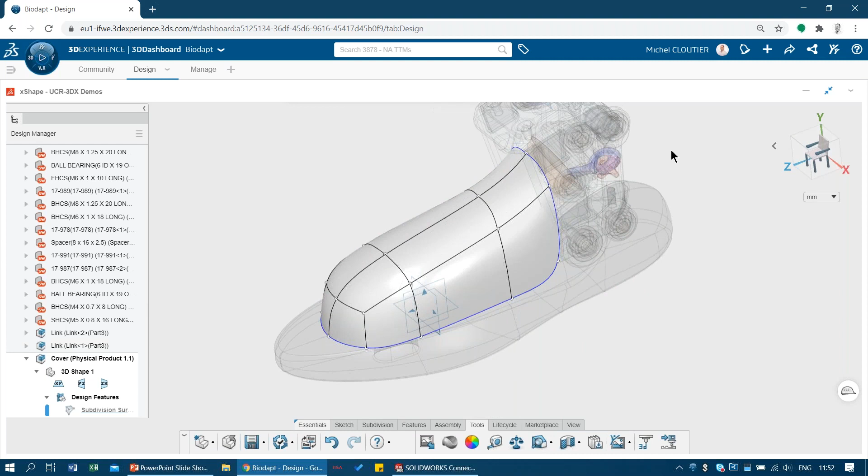I want to do the same thing for this edge here. Again, just by selecting the arrows, pushing them in, I remove the problem areas for the draft. Everything looks good now. So at this stage, I'm gonna say, yeah, I'm fine with that, but that's still a solid shape. I wanna have a shell.

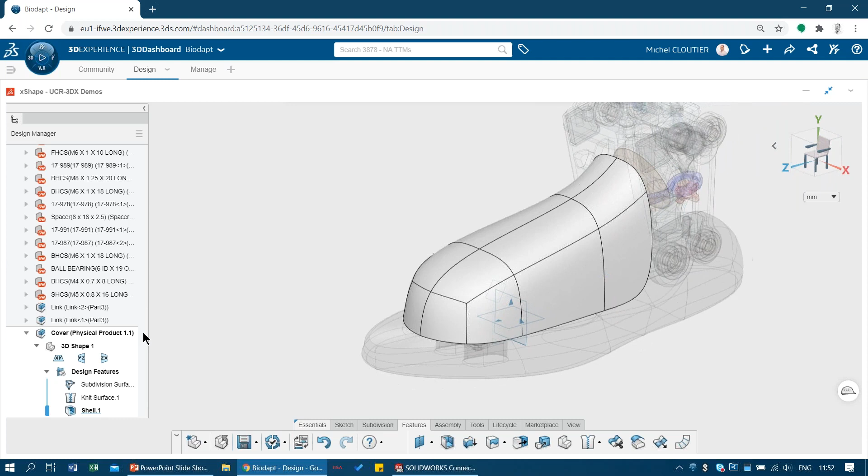So in my features, I'm simply going to say that I want to shell it maybe 2 millimeters and select this face. I want to go 2 mils outside instead of inside. Click OK. And now, very nice shell for my assembly. So very quickly, I can go back to my assembly, see how everything looks in the assembly. Now, I probably realize there's going to be some collisions here, so I might have to do some changes.

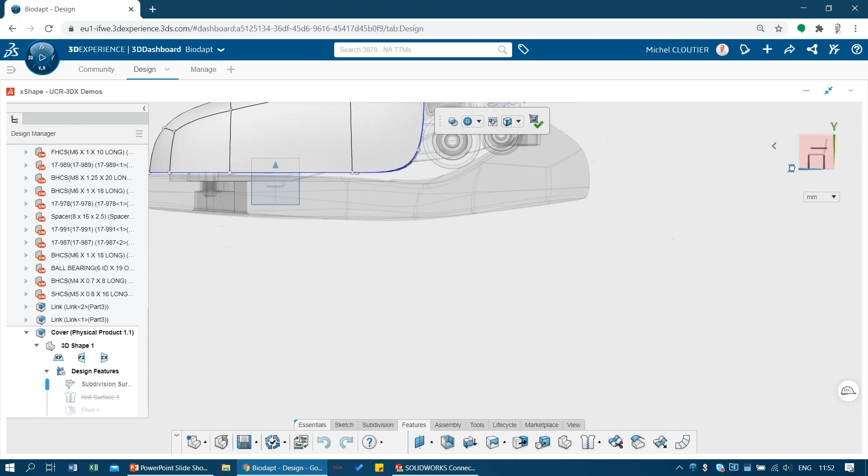Well, that's easy. I can simply go back into my subdivision model. It's going to activate it automatically and put it in edit mode. And what I'm going to do here is simply window select these points and maybe angle them a little bit and maybe just push them in this much, right? So I change the shape a little bit. I click OK. Everything's going to rebuild, even the shell.

Everything looks good. I want to see the whole assembly. Double click. Everything is awesome. Everything is nice. So really a nice kind of shell that I've created using xShape. Now the other thing I can do, just to finish the work, is in my to-do, actually let's just refresh this because if I'm not mistaken, we actually pushed the create cover in the in work. There it is.

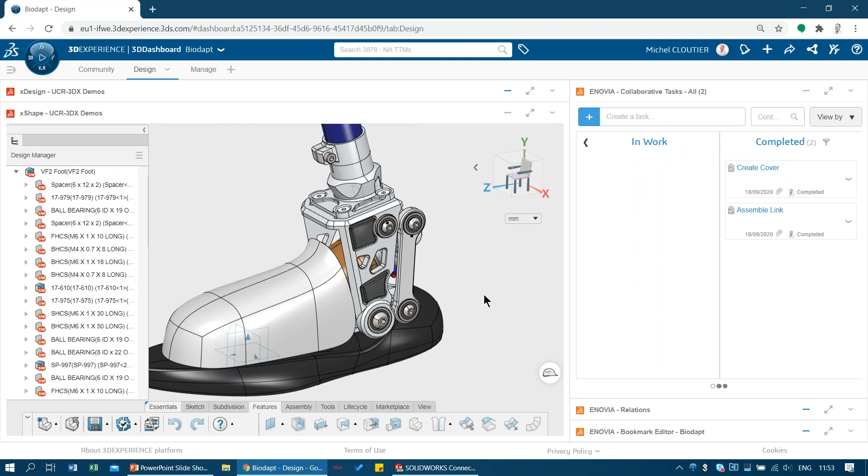So now once this is done, I could actually attach the cover back into my task and take this task and move it to complete. Just as easy as that. And if I wanted to, I could also go back inside of SolidWorks and do an update, and my cover would simply appear inside of SolidWorks. Actually, let's do it. If we go over here, right click and reload from server. This is going to take a couple seconds.

So while this is doing in the background, let's talk about the interoperability between the apps. So we saw that everything is really integrated with the 3DEXPERIENCE products, 3DEXPERIENCE SolidWorks. We kind of bundled them into offers that include xDesign and can include xShape to do the very organic shape like the last cover I did. But everything is well integrated. I can open SolidWorks files into my cloud tools. I can open the cloud design tool files into SolidWorks and finish the design over there.

So basically what we saw about 3DEXPERIENCE SolidWorks, pretty much the same SolidWorks we know. The main difference is going to be how files are saved and managed. The file management is built in, it's cloud, secured cloud file management. Now, depending on which offers, I'll talk about offers a little bit, you can also add Visualize Professional. So if you want to do really high-end rendering, you can use SolidWorks Visualize to do that. You also have access to simulation tools, depending again on the packages you use.

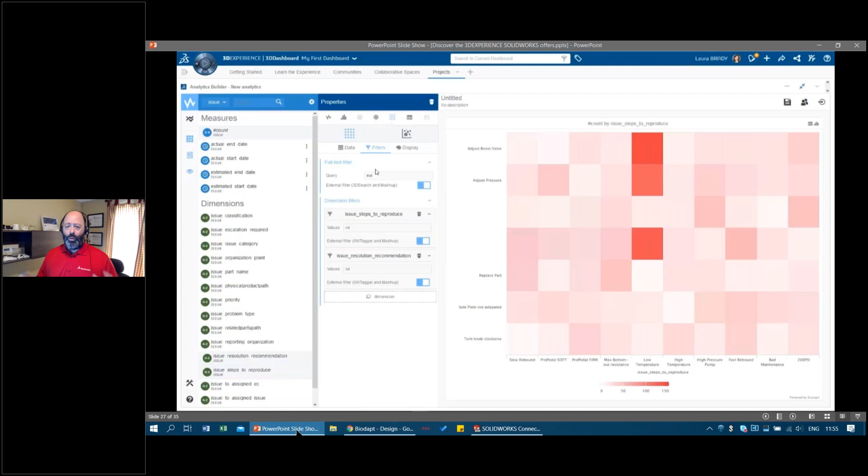But once everything is on the platform, you have access to so much more. Project planning. We talked about tasks, but the next step is project planning. But there's also tools for manufacturing, analytics, all that stuff. So the platform is really much more than just where files are stored. Now, if I recap about 3DEXPERIENCE SolidWorks.

So yeah, if I recap about 3DEXPERIENCE SolidWorks, what it is, the difference is, oh, there's my update going in the back end. Let's put that in the foreground for now. So the updates are installed directly from the platform. That makes deployment a lot easier. You don't have to run around computers to install service packs. The users can install it themselves from the platform.

You're always on the latest version as well. As soon as there's an update to the platform, those updates are pushed down to our users automatically. Between updates, we can even push critical fixes if we have to. Doesn't always happen, but if it does, we have the possibility to do that. So you don't need to manage admin images and network deployments anymore. Everything is installed and run through the platform.

But the platform is, again, the secure cloud backup and storage. Everything is stored on the cloud, managed on the cloud, and now you have access to all that data very easily at your fingertips.

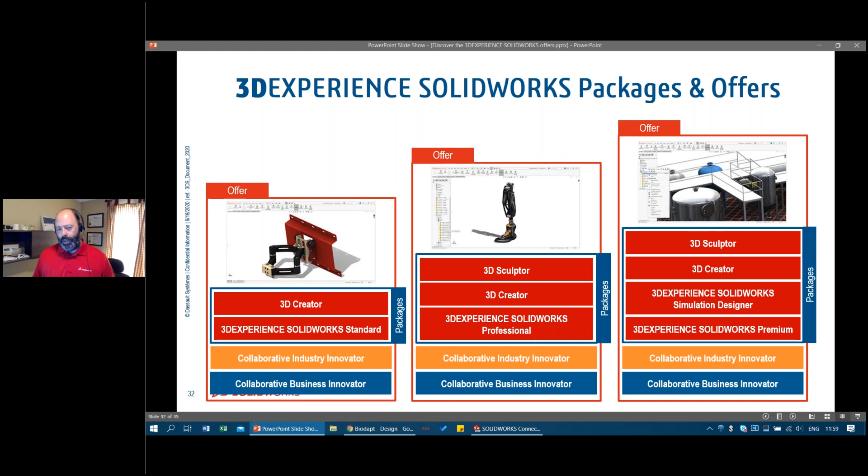Now, we talk about 3DEXPERIENCE SolidWorks, but I want to make sure that everyone understands we're not replacing anything, right? It's just another tool that we're adding to our portfolio. In fact, everything I showed today, you can basically just add to your current SolidWorks. If you're a current SolidWorks user, you can just pick and choose whatever you want to add to your current SolidWorks product. If you just want to have data management on the cloud, but you want to keep your SolidWorks that you already bought and it's yours, fine, keep it. We can simply take that and connect it with the data management tools on the cloud.

The difference with 3DEXPERIENCE SolidWorks is that it's already built in, right? So we've got two options. If you want to keep your traditional SolidWorks desktop, connect that to the cloud to get data management, that's fine. If you're open to go directly with the cloud data management and use 3DEXPERIENCE SolidWorks, that's another option. I just wanted to make sure everyone understands we're not removing anything. We're just adding options for you to choose from.